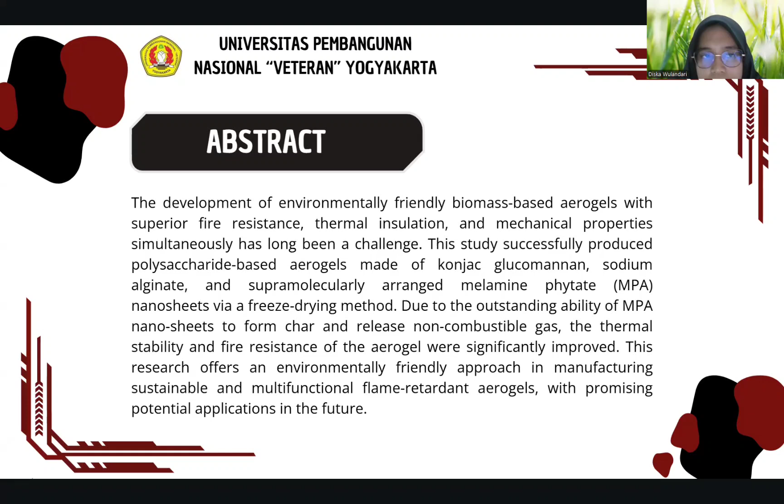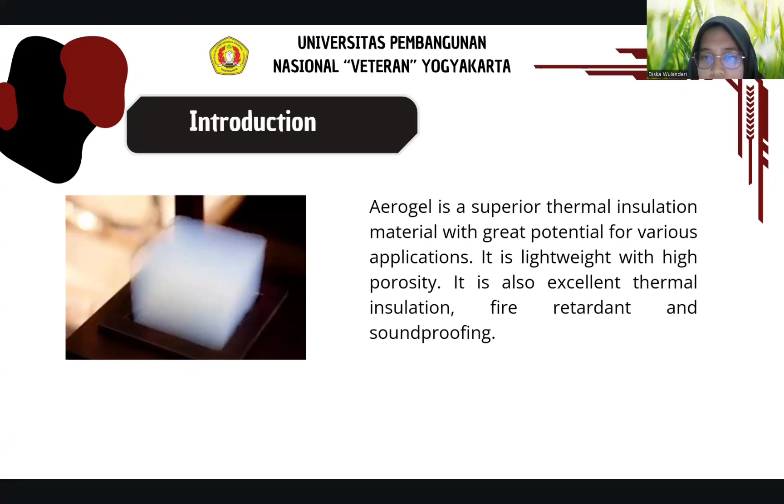Here I will discuss the importance of developing thermal insulation material that not only has good fire resistance but also biodegradable property to prevent fire accidents caused by organic insulation material. They are highly flammable. We have to know what aerogel is. Aerogel is a superior thermal insulation material with great potential for various applications. It is lightweight with high porosity, and it is also excellent for thermal insulation, fire retardance, and soundproofing.

As the use of thermal insulation material in buildings increases, fire accidents caused by this material are also becoming more frequent. Many thermal insulation materials used, such as expanded polystyrene foam and polyethylene foam, while effective in thermal insulation, are highly flammable and not environmentally friendly. Therefore, there is an urgent need to develop safer, more fire-resistant materials that can also biodegrade naturally.

One potential solution to this issue is the use of biomass-based aerogels. Aerogels have high porosity, large surface area, and excellent insulating property. Biomass aerogels, especially those based on polysaccharides such as konjac glucomannan or KGM and sodium alginate or SA, offer good biodegradability. However, although KGM-SA based aerogels show promise in terms of insulation property, their performance is still limited, especially regarding fire resistance and mechanical strength.

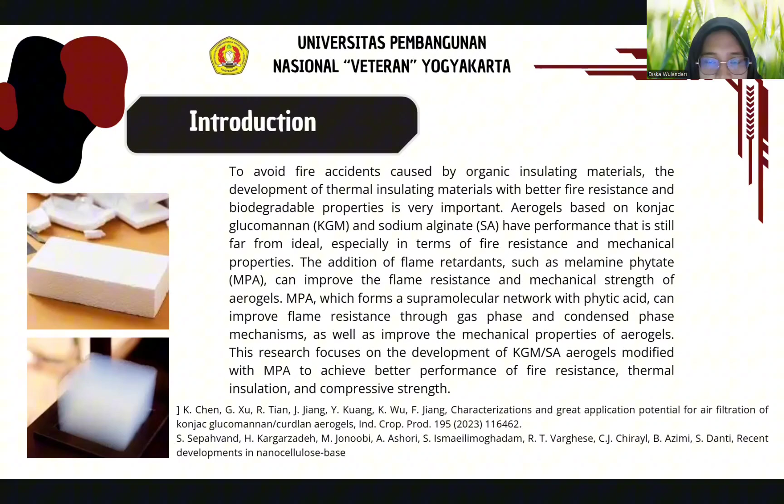Next is methodology. We have materials. The first is KGM or konjac glucomannan, supplied by a konjac technology company with a molecular weight of 9.67 times 10 to the power of 5 gram per mole. SA or sodium alginate purchased from Macklin Biochemical with a viscosity of 200 plus minus 20 millipascal second.

Third is PA or phytic acid, aqueous solution 50 wt%, provided by Macklin Biochemical Co. with molecular weight of 660.04 gram per mole. Fourth, MEL or melamine supplied by Macklin Biochemical with a molecular weight of 126.12 gram per mole.

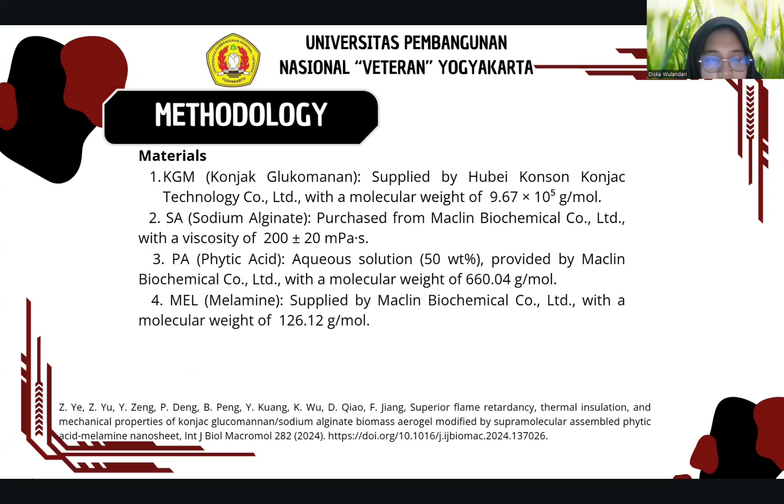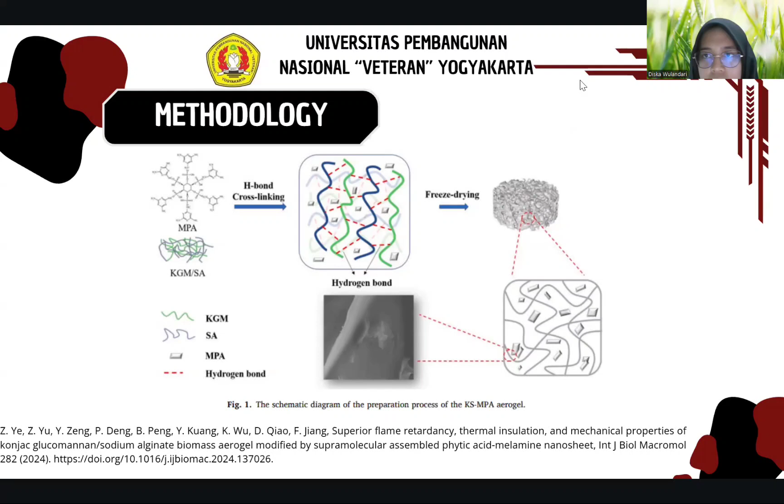Next is preparation of MPA or melamine phytic acid nanosheet. First, disperse 34.8 grams of MEL in 400 ml of deionized water at 80 degrees Celsius for 10 minutes using a water bath. Second, slowly add 44% b/v diluted PA solution to the MEL dispersion at 80 for 30 minutes with mechanical stirring.

Third, cool the dispersion to room temperature, collect the sediment by vacuum filtration, and wash with distilled water. Fourth, dry the product in an oven at 80 degrees Celsius until a constant weight is achieved, obtaining the MPA nanosheet.

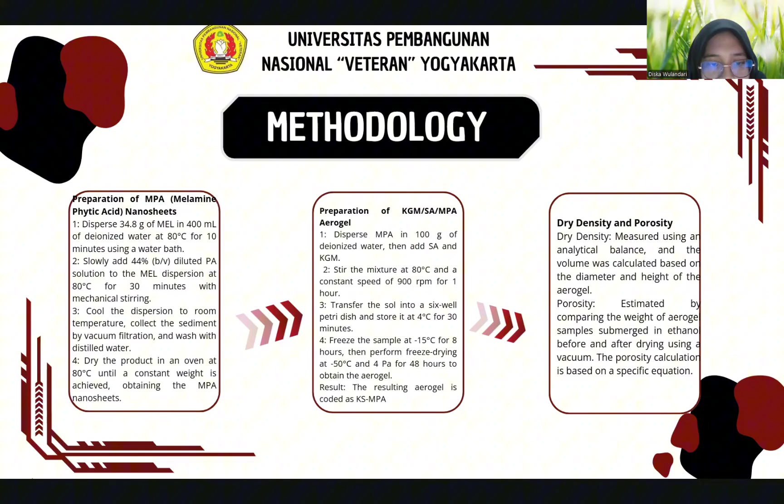Next is dry density. Dry density is measured using an analytical balance and volume calculated based on diameter and height of the aerogel. Porosity is estimated by comparing the weight of the aerogel samples submerged in ethanol before and after drying using a vacuum. The porosity calculation is based on a specific equation.

In situ Fourier transform infrared spectroscopy or FTIR analysis. Produced samples were sliced into 2 centimeter by 2 centimeter by 2 millimeter pieces, dried at 60 Celsius for 12 hours to remove moisture. Scanning range 600 until 4000 centimeter with a resolution of 4 centimeter and 32 scans.

Next is microstructure analysis. Scanning electron microscopy or SEM is used to observe the microstructure of aerogel samples and MPA nanosheet. Samples were coated with gold before imaging. Atomic force microscopy or AFM is used for observing the morphology and height of MPA nanosheet. X-ray photoelectron spectroscopy or XPS analyzes the elemental composition of MPA.

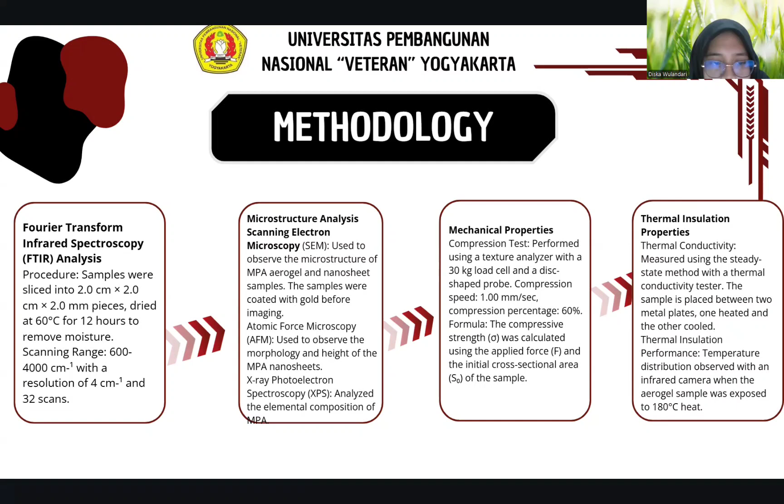Next is thermal insulation property. Thermal conductivity is measured using a steady state method with a thermal conductivity tester. Sample placed between two metal plates, one hot and the other cooled. Thermal insulation performance: temperature distribution observed with an infrared camera when the aerogel sample was exposed to 180 Celsius heat.

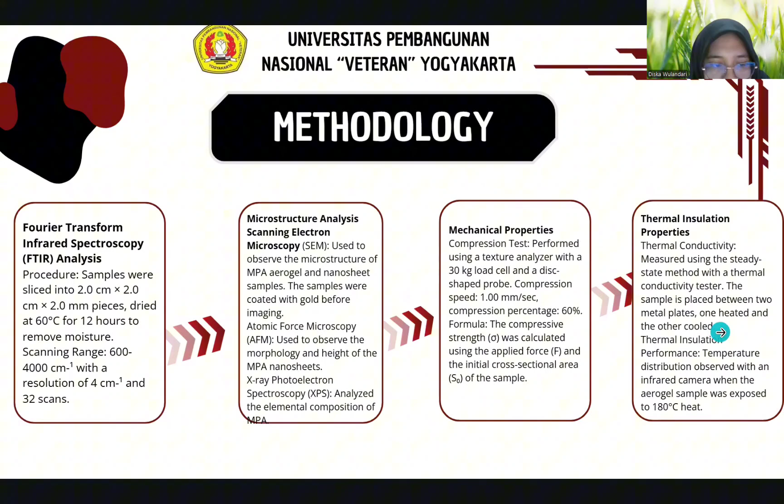Next is thermal insulation property. Thermal stability. Thermogravimetric analysis or TGA performed in nitrogen atmosphere to study the thermal degradation of aerogel. Samples were heated from 40 to 800 Celsius.

Next is burning behavior. Burning test: aerogel samples were exposed to high temperature torch for 5 seconds. LOI or limiting oxygen index, measured according to ASTM D2863. Heat release measured with a microcalorimeter.

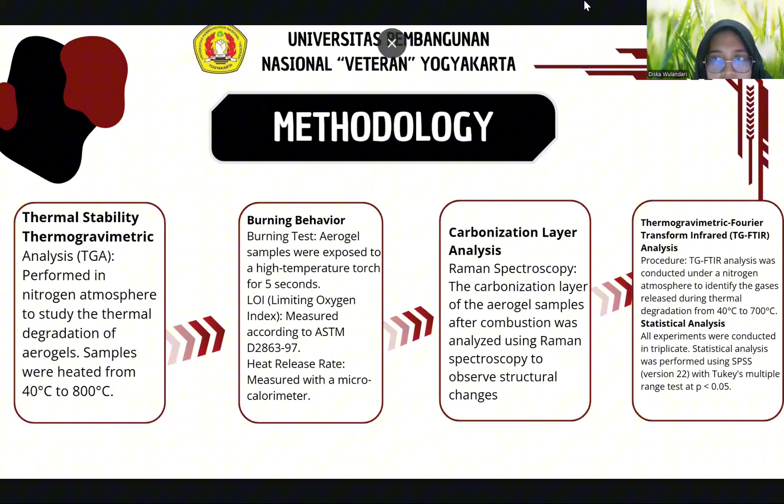Next is discussion, with 3.1 synthesis and characterization of MPA nanosheet. To verify the success of MPA nanosheet synthesis, what structural and thermal properties were characterized? FTIR spectra, figure 2A, showed the characteristic amine peaks at 3,468 and 3,349 centimeter observed in MEL but separate in MPA, with new peaks at 3,330 and 3,125 centimeter attributed to ammonium and slightly uncharged amine.

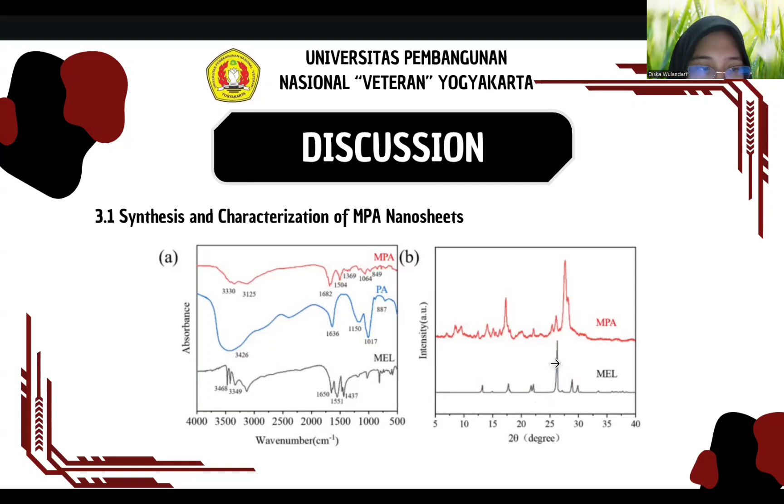Thermal stability shown in TG and DTG curves, figure C and D, indicated that MPA had good thermal stability with a 45% residue at 700. XPS spectra, figure 2E, confirm the presence of phosphorus and nitrogen.

SEM showed MPA nanosheet with characteristic parallelogram shape. AFM, figure 2G and 2H, showed a transverse diameter of 300 nanometer and thickness of 10 nanometer, consistent with similar study. This confirms the successful synthesis of MPA nanosheet.

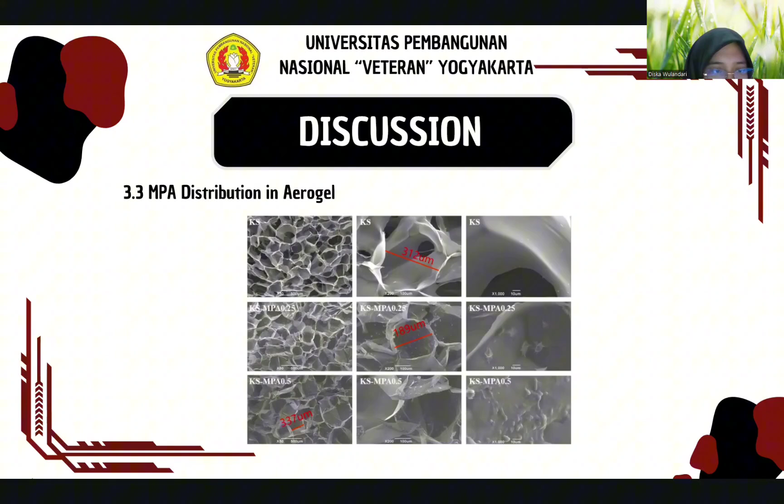Pore size increases with higher MPA content, thus 0.5 wt% MPA is recommended for aerogel preparation.

Third, 3.4 mechanical property. Mechanical properties play a crucial role in the practical application of aerogel. Aerogel KS 0.5 could support up to 7,100 times its weight without visual deformation, figure A. The compression test, figure B and table S1, reveals 3 phases: initial linear deformation, plastic deformation and densification.

The maximum compressive strength of aerogel KS was 141.5 kilopascal, while KS MPA 0.5 saw a significant increase to 364.9 kilopascal.

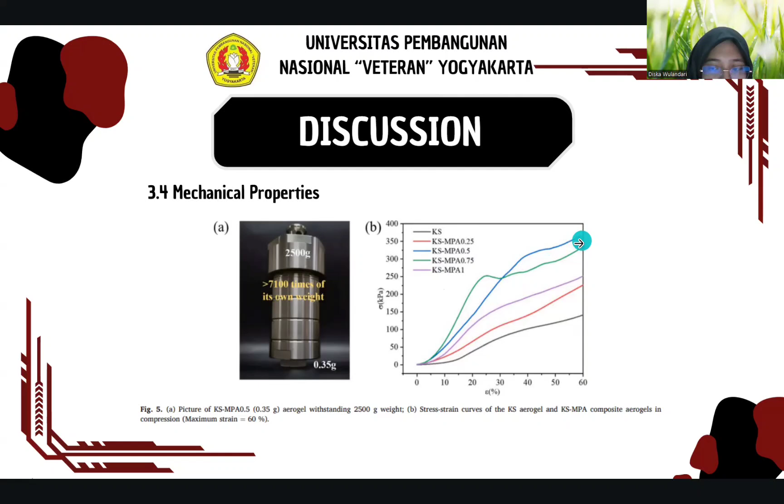3.5 Thermal stability. Thermal stability is an essential property for thermal insulation and fire resistant aerogels. TG and DTG curves of KS and KSMPA aerogel, figure 6, showed that KS aerogel had a residue of 36.44%, while KSMPA aerogel had higher residue rates of 39.23% for KSMPA1. The addition of MPA improved thermal stability with clear char layer formation that delayed heat penetration.

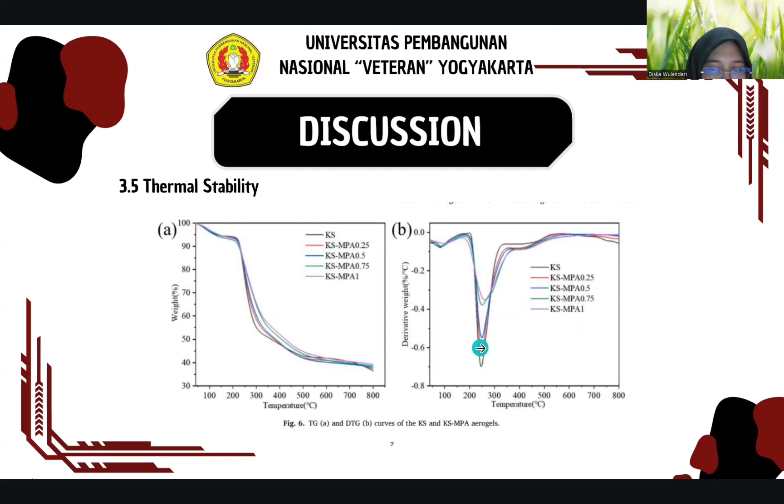3.6 Thermal insulation performance. Thermal insulation property was evaluated by monitoring temperature change during heating at 180 Celsius in Figure A. Aerogels showed similar heat retention, with the temperature difference between the top and bottom maintaining around 100 Celsius after 5 minutes of heating.

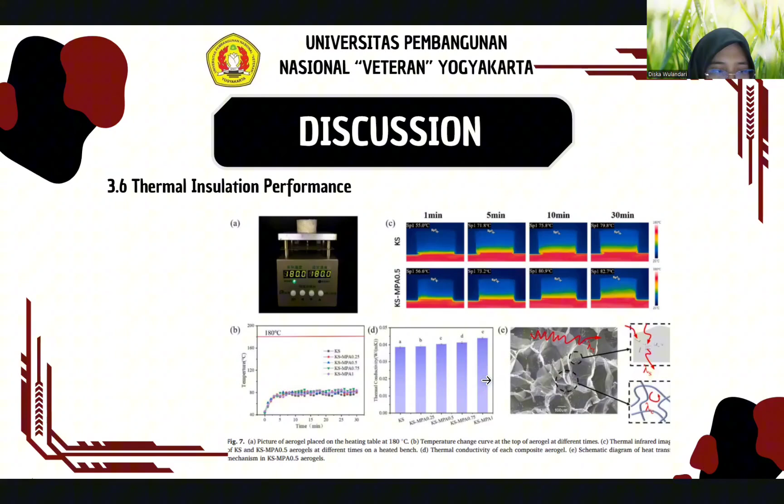Next is 3.7 Fire resistant property. The fire behavior of aerogel was characterized using LOI and UL94 vertical burning tests. KS aerogel had an LOI of 23.4% and V1 rating, while KS MPA aerogel saw improved fire resistance with a maximum LOI value of 39% and V0 rating for MPA concentration above 0.5%.

Microcalorimeter tests in figure B and C reveal a significant reduction in peak heat release rate, or PHRR, and total heat release, THR, in the case of MPA aerogel, indicating that MPA addition suppresses the exothermicity of the aerogel. Morphological analysis of the char residue showed that KS aerogel shrank to ash, while KS MPA retained a char layer that protects the aerogel from further combustion.

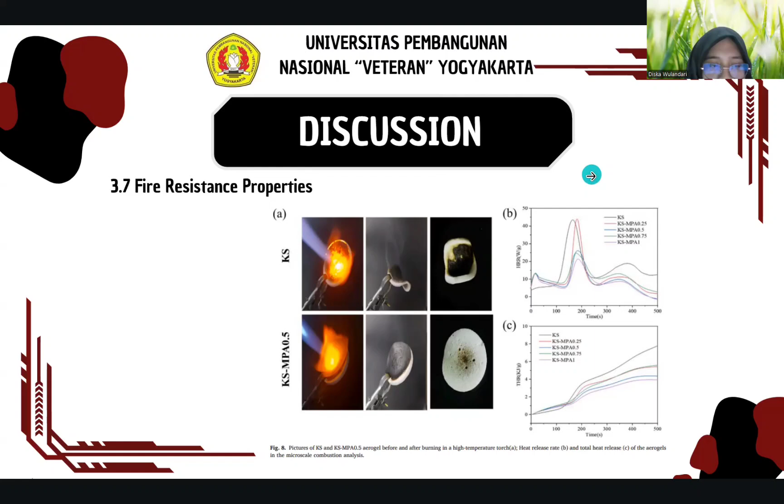94 test. MPA improves fire resistance through gas phase and condensed phase synergistic mechanisms. Excess addition above 0.5 wt% damages the pore structure, reduces porosity, and weakens mechanical performance and thermal insulation. KSMPA 0.5 aerogel is suitable as a replacement material for fire resistant exterior walls in construction, supporting the development of green industry by improving fire resistance and mechanical property without compromising thermal insulation.

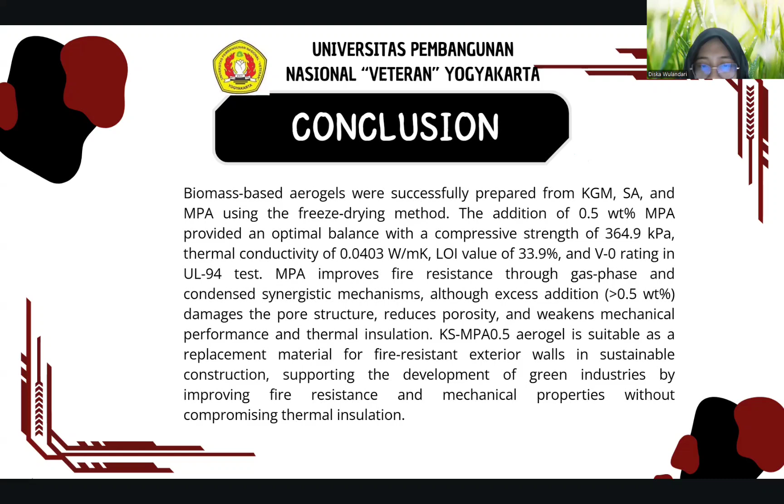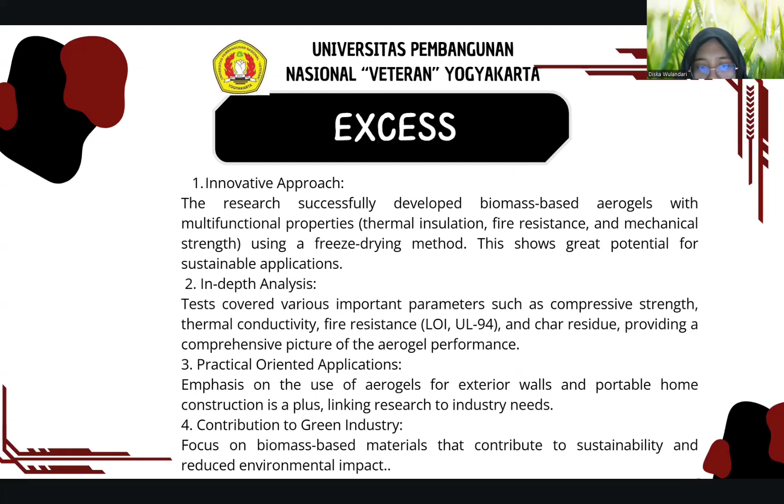Third, practical oriented application. Emphasis on the use of aerogel for exterior walls and portable home construction is a plus, linking research to industry needs. Fourth, contribution to green industry. Focus on biomass-based material that contributes to sustainability and reduces environmental impact.